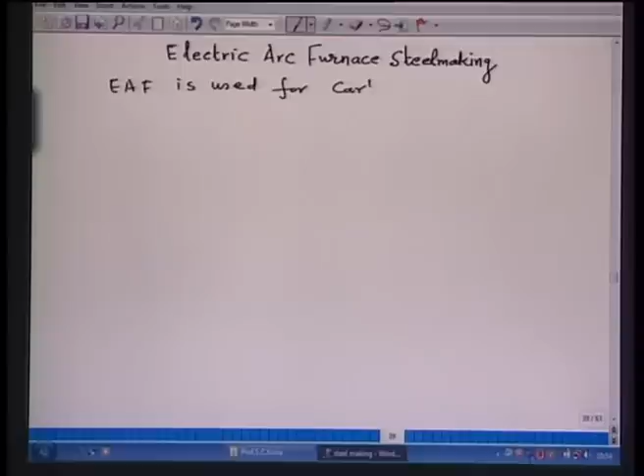Many steel plants have contributed to the growth of electric furnace steel immensely. Presently, electric arc furnace is used for carbon steel making as well as alloy and special steels.

Electric arc furnace is used for production of long products, but nowadays flat products are also being produced. In India, according to one estimate, 26% is the contribution from electric arc furnace in 2006-07 out of total of 50.9 million tons of crude steel.

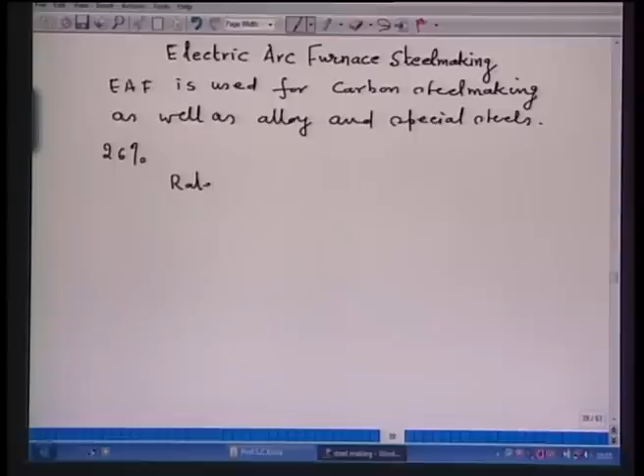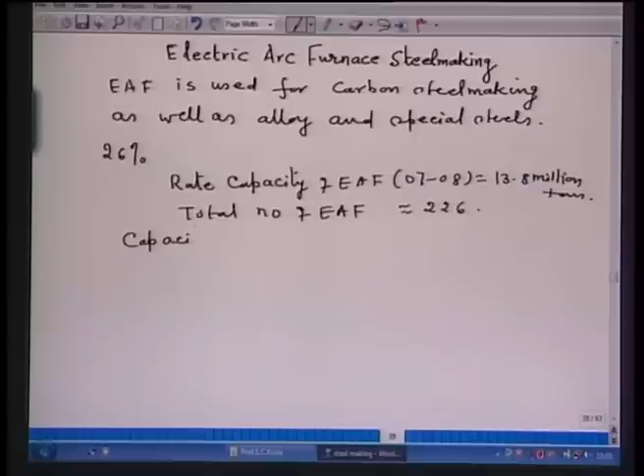Rated capacity of electric arc furnace in 2007-2008 it was 13.8 million tons. Total number of EAF in the same year 2007-2008 was of the order of 226. Capacity utilization is 78% in the year 2007-2008.

Now, this all shows that electric arc furnace has become a major steel producing route in recent years.

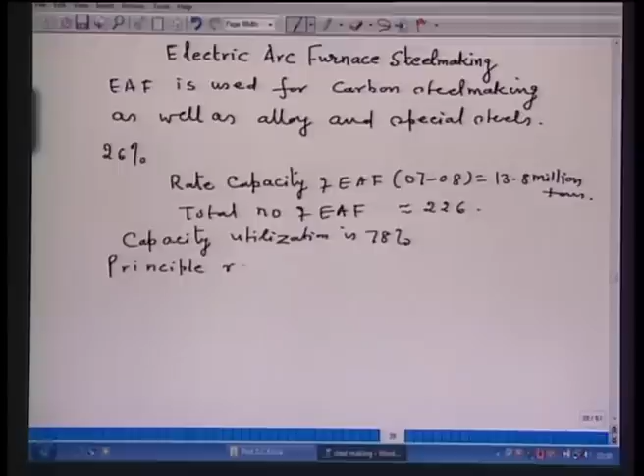Now, principal raw material is scrap, carbon steel scrap or alloy scrap. Source of energy, major source of energy is electricity. Earlier this was the problem that electric consumption was very high, that has hampered the growth of electric furnace steel industry, but now alternative energy sources are also being used. So, with that reason the electric arc furnace has become a preferred route.

Now, how does an electric arc furnace function? Electrical energy is used to produce an electric arc which heats the metal either directly or through arc radiation. To produce an arc, a combination of electrodes are required. Two types of electric arc furnaces are now available presently: one, alternating current electric arc furnace, and another direct current electric arc furnace.

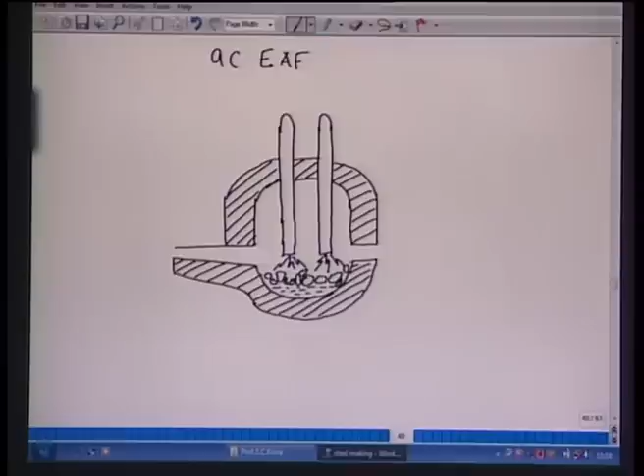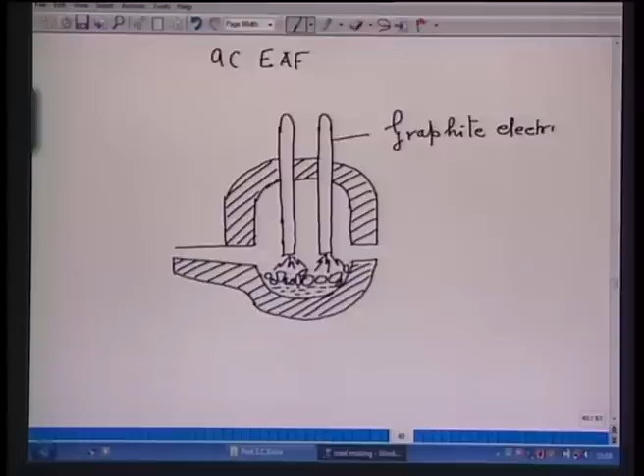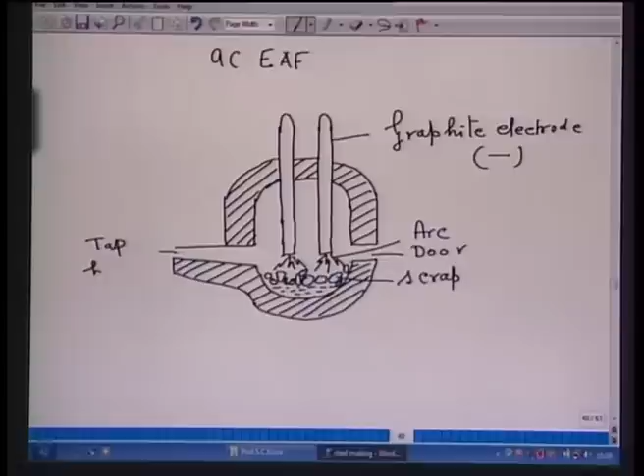In alternating current electric arc furnace, the combination of electrode and cathode looks as shown in the figure. This is a graphite electrode, which is negatively charged, and this is the scrap which also acts as an anode. This is the arc which is produced when graphite electrode hits the scrap. This is the door for charging, this is the tap hole. So, that is how the arrangement of electrode looks in ACEAF.

So, principally what an alternating current electric arc furnace does, a graphite electrode contacts the scrap which acts as an anode, arc is being produced, with the radiation heat of the arc the melting occurs. In alternating current furnace we use 3 electrodes.

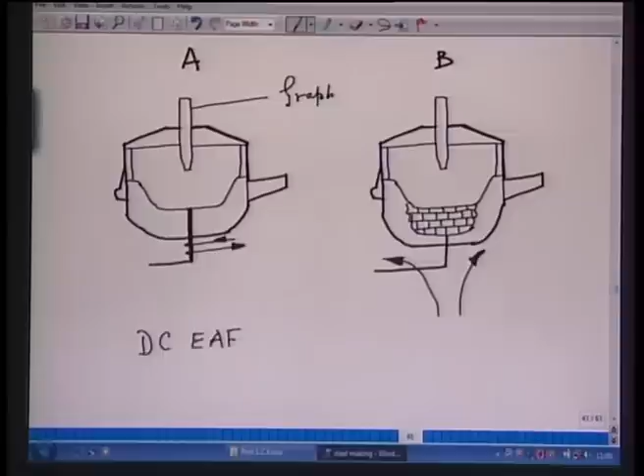Now, another combination of electrode is DC electric arc furnace, which is shown in figure A and B. In figure A and B, this is again the graphite electrode. In DCEAF, one graphite electrode is used instead of 3 which are used in the ACEAF, and another electrode is fixed at the bottom of the electric arc furnace. There are different ways of fixing an anode at the bottom. Here I have shown you 2 ways in figure A and B.

So, in figure A you are seeing that this anode is solid metal. Now, of course, this gets heated up, so it is water cooled. This is one arrangement of cathode and anode in DCEF.

Another arrangement, this is the anode, and in this type of DCEF, anode is a conducting hearth with carbon MgO lining. Electric current is fed with copper plate which is installed at the bottom. This is in fact the copper plate, this is the tap hole, and so on.

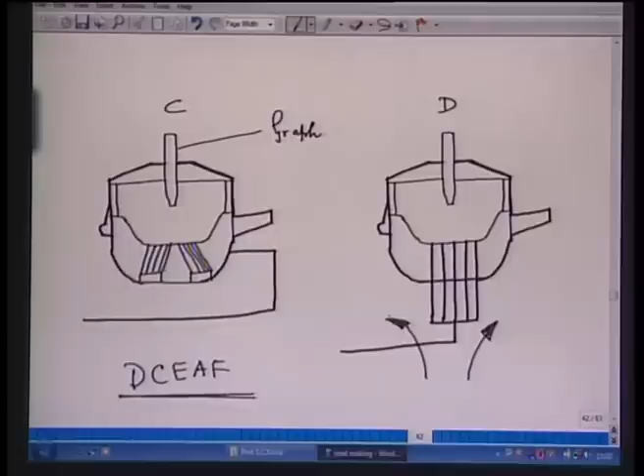There are 2 further arrangements available for fixing up the anode, which is shown in figure C and D. Again in C and D figure, this is the graphite electrode, but the anode is different in both cases. In C, the anode consists of thin sheet, and this is rammed with magnesia MgO ramming mass.

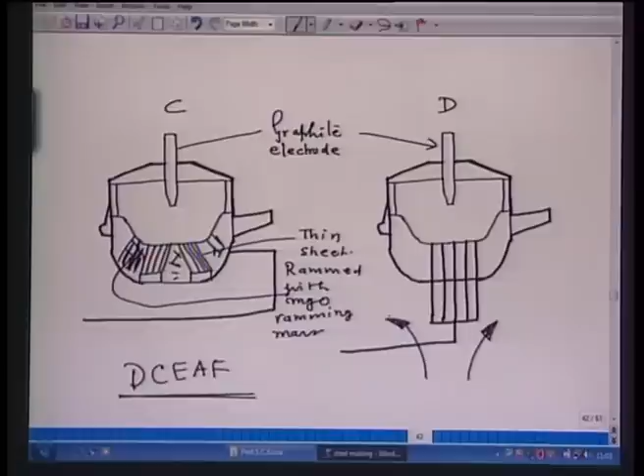That means, this is the bottom, and this is the so called ramming mass, and this is the electrical connection. In the fourth arrangement, shown at D, these are the metal rods. This acts as a positive electrode and they are embedded in

CMGO or MGO ramming mass. So, in electric arc furnace there are essentially two types of furnaces: ACEF, that uses 3 graphite electrodes; DCEF uses a single graphite electrode, and anodes are embedded in the bottom of the electric arc furnace, with different arrangements of embedding the anode. ACEF, alternating current electric arc furnace, has been used for quite a long time, whereas DCEF is a recent phenomenon.

As regards the construction of the main part of the electric arc furnace, it is not very much different between ACEF and DCEF. The only difference between the two is in the arrangement of the electrodes and anodes. In ACEF, 3 graphite electrodes are used; in DCEF, a single graphite electrode is used and the anode is embedded in the bottom. In ACEF, the anode is the metal itself.

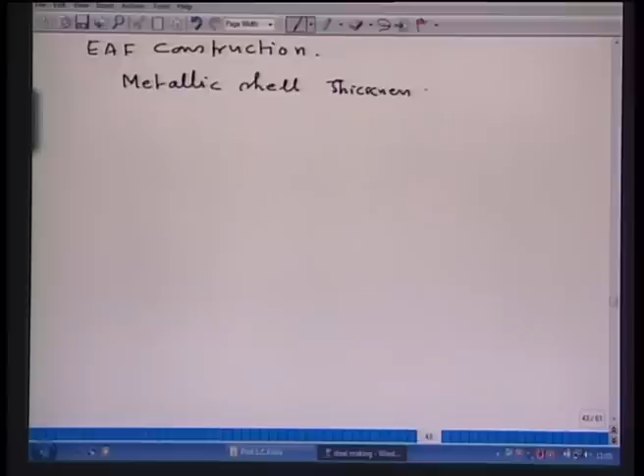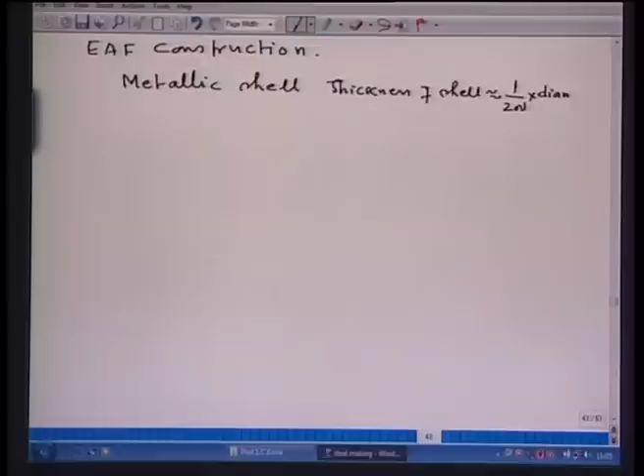Of course, the metallic shell, and the thickness of the shell is approximately 1 by 200 times the diameter of the furnace. So, for example, if we have a 200 ton electric furnace with 8500 millimeter diameter of the shell, then the shell thickness is around 45 millimeter.

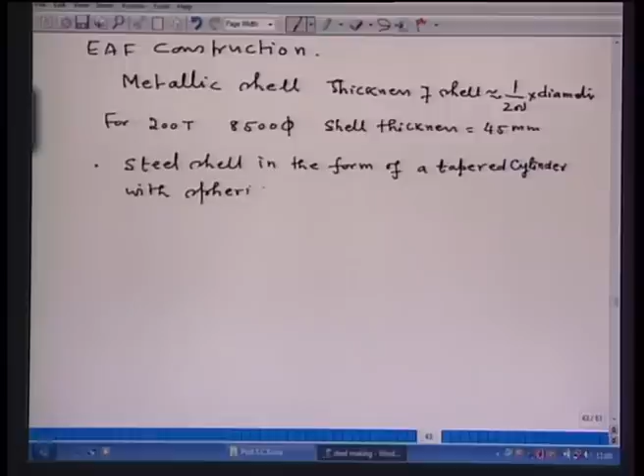Now, some important features of the construction of an electric arc furnace: the steel shell is in the form of a tapered cylinder, which you have already seen in the earlier sketches, with a spherical bottom. The spherical bottom has a slight advantage because the molten metal can be collected very easily over there. Of course, the shell has a refractory lining from inside.

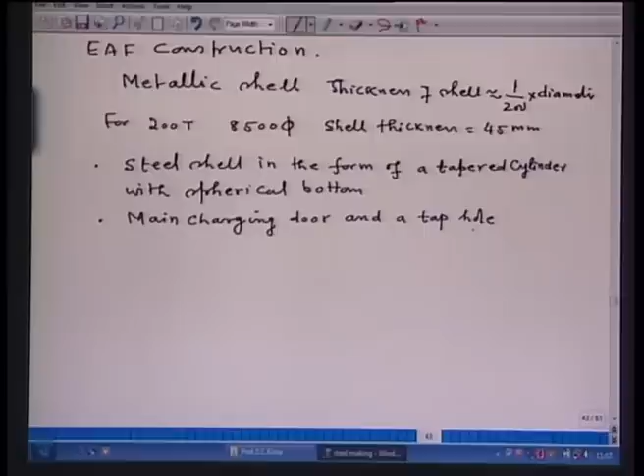Second important thing: main charging door. It has a main charging door and a tap hole, as you have seen in the sketch of AC EAF. AC EAF works with 3 electrodes, whereas DC EAF works with 1 graphite electrode and 1 separate anode which is built at the bottom of the electric arc furnace.

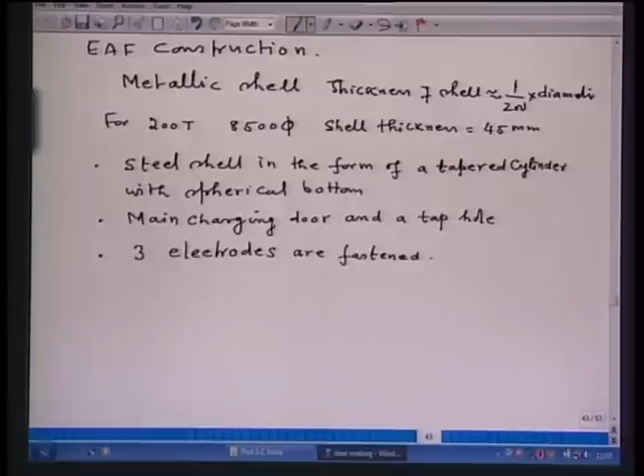AC EAF works with 3 graphite electrodes and they are fastened in electrode clamps. The diameter of the graphite electrode is of the order of 400 to 700 millimeter. It's a quite heavy electrode.

Fourth, current is supplied. The current is supplied by water cooled cable.

Now, typically a 200 ton electric arc furnace: supporting fixtures have a height of approximately 8,600 millimeter. The main furnace has a height of approximately 9,200 millimeter.

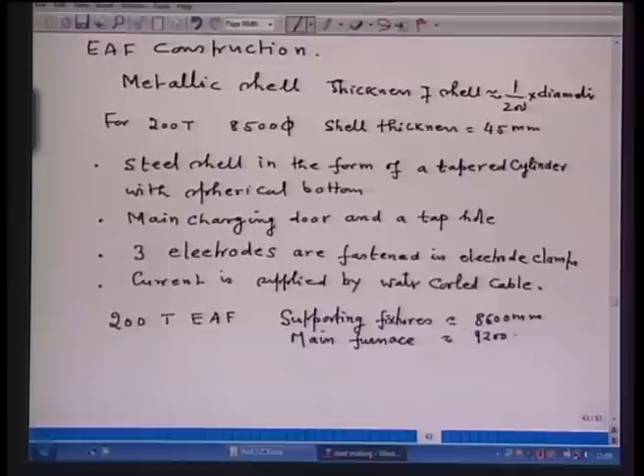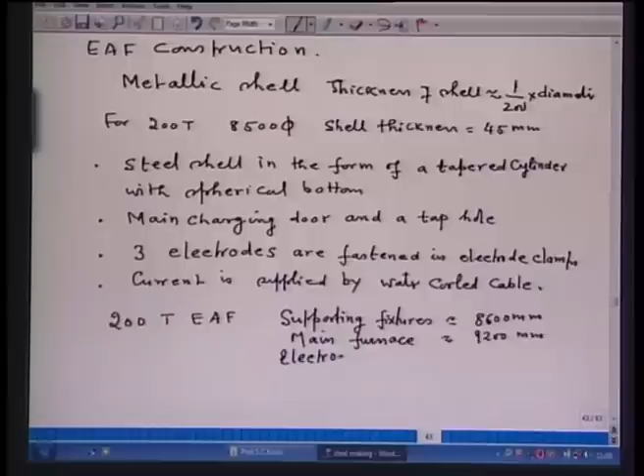Then, because the electrodes are to be lowered and raised, the roof has to be removed. So, for that an arrangement is required on the top of the electric arc furnace, so that a space exists to raise or lower the electrode. So, for electrode insertion and withdrawal mechanism, the approximate height is 7,300 millimeter.

So, an EAF plant for example of 200 ton electric arc furnace capacity will have approximately a height of 25,100 millimeter. So, you can imagine, for the plant layout, that you need 25 meters of height to accommodate the furnace, supporting fixtures, electrodes, and withdrawal mechanism.

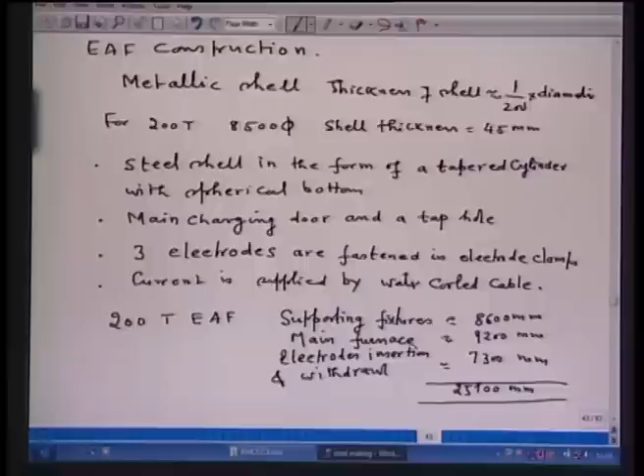Then you require a crane which holds the basket containing scrap. Then you also require a place to tap the slag and molten metal. You require a ladle so that metal can be tapped into it, and all such arrangements are required. So, you can imagine a layout of an electric arc furnace, what it will consist of. All these things are to be placed properly, so that a smooth movement of the inflow and outflow material is guaranteed. That is the important thing over here.

Now, another important thing, refractory lining. Because a metallic shell cannot be used for production of steel - all the heat will be lost, and metal and slag will react - you require a refractory lining. Remember, refractory lining is the heart of steel production, particularly liquid steel production.

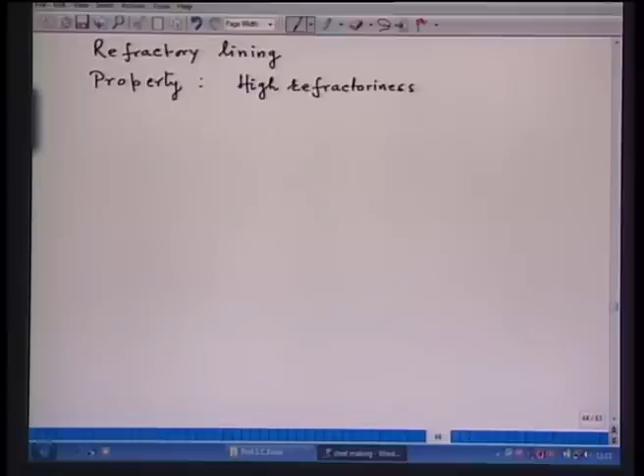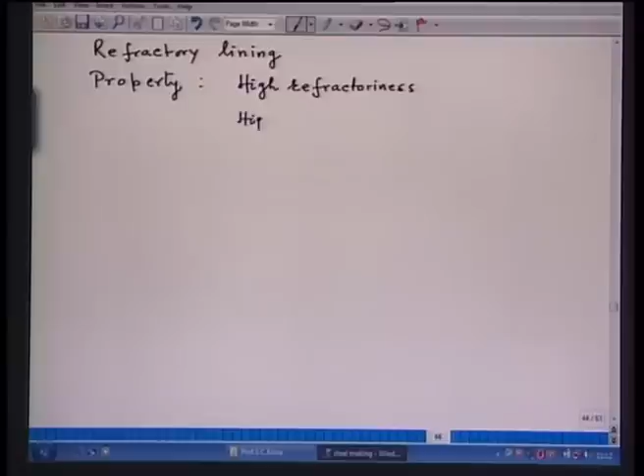So, some of the properties required for refractory: first, you require high refractoriness. Naturally, the refractory should be able to sustain the high temperature created particularly in the arc, because the walls and roof of the furnace will be heated by radiation from the arc, and an arc has a very high temperature. On account of that heat, the refractory lining should be able to sustain that temperature. Also, it should require high mechanical strength, that is, resistance to compression. Then it should also withstand thermal stresses.

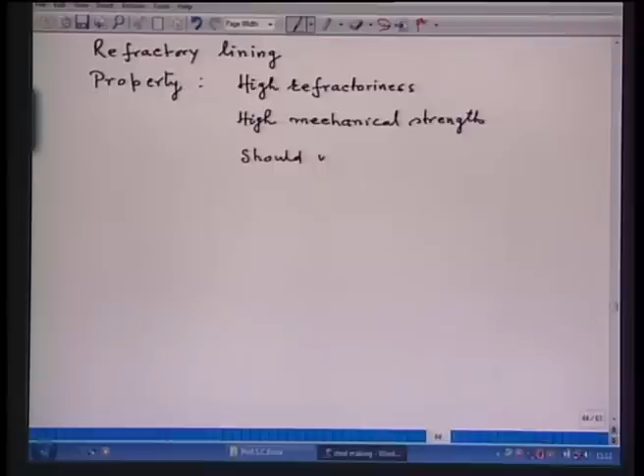Another very important property required for refractory lining material is that it should be chemically stable and non-reactive to slag, metal and gases. Another important property: the lining should have low thermal conductivity.

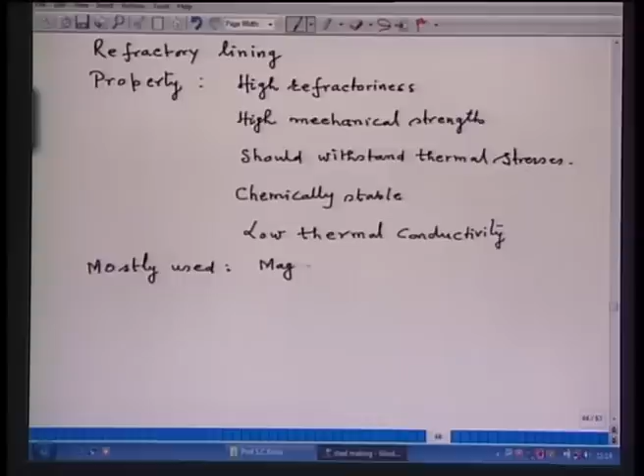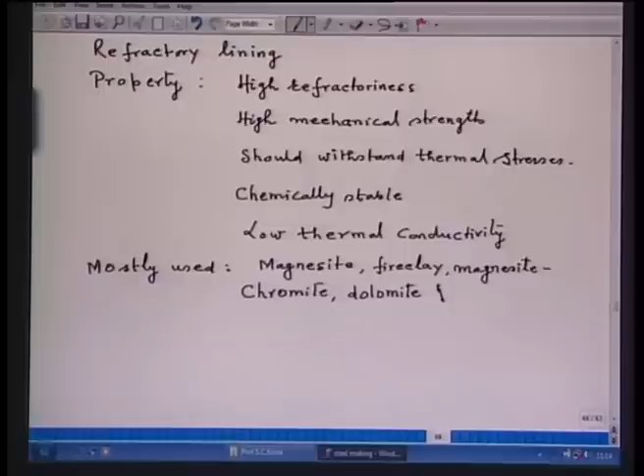Low thermal conductivity ensures that heat losses will be minimum. The mostly used refractories are magnesite, fire clay, magnesite chromite, dolomite, and silica, to line different parts of the electric arc furnace.

The parts consist of bottom, tap hole, side wall, roof of the furnace, and door. They have different requirements, and these different requirements are met by different types of refractory material, because the cost of the refractory material is also an important issue. You cannot put a very expensive refractory where it is not required. So, depending on the requirement, the particular type of refractory is put in the lining of the electric arc furnace.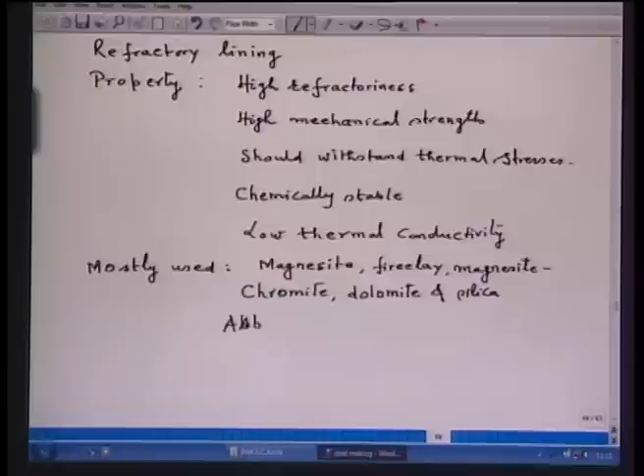Asbestos and lightweight bricks are used for insulating purposes, close to the shell, where the requirements are not that stringent. One can put the lighter refractory material, because the objective there is to block the heat and avoid thermal losses. Whereas the refractory which faces the metal and slag should be a very high quality refractory, able to sustain the chemical attack of slag, metal and gases. So, depending on the requirement, this refractory can be used.

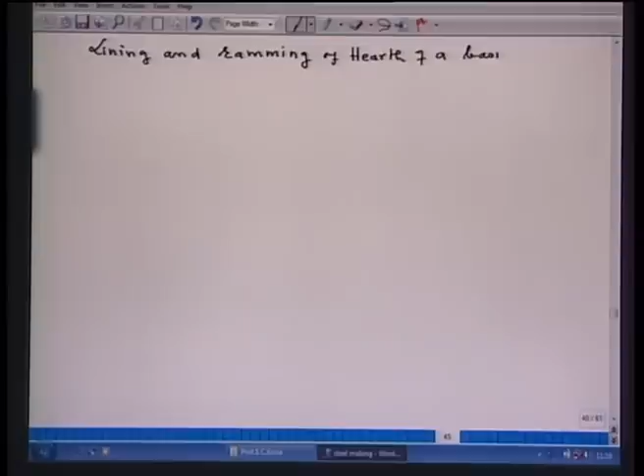Now, lining and ramming of the hearth of a basic furnace. Here again, there are acid furnaces and basic furnaces. Acid electric arc furnace can be used only for melting purposes, but in the basic EAF one can do refining also.

The main difference between the two is in the refractory lining. Nowadays, because the electric arc furnace is used for carbon steel making, where refining is also required, basic electric arc furnaces are widely employed, because their refining can also be done. Refining means particularly removal of sulfur and phosphorus, which is not at all possible in the acid electric arc furnace, because the lining is acid. For removal of sulfur and phosphorus, you require basic lining. So, basic electric arc furnace is widely used because of the production of carbon steel, which requires refining also.

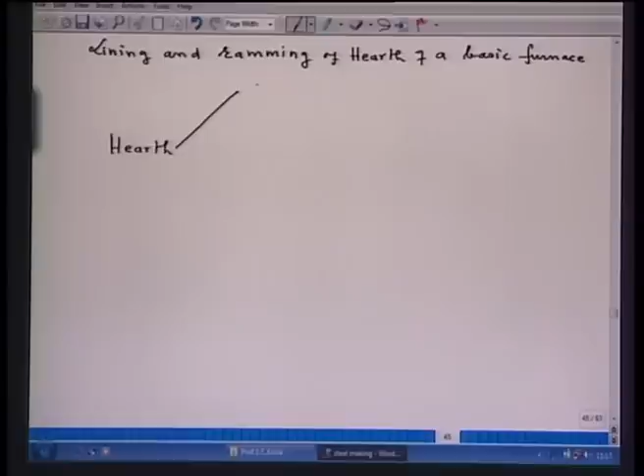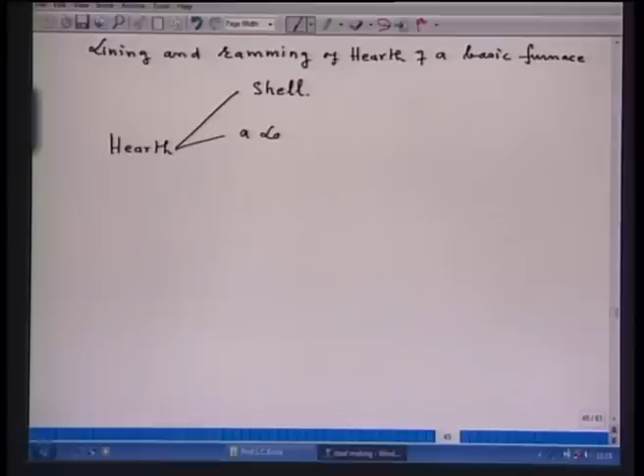A hearth consists of the following layers. First of all you have a shell, then on the top of the shell, a layer of heat insulating material. If I show it here, this is the shell, this is the insulating material.

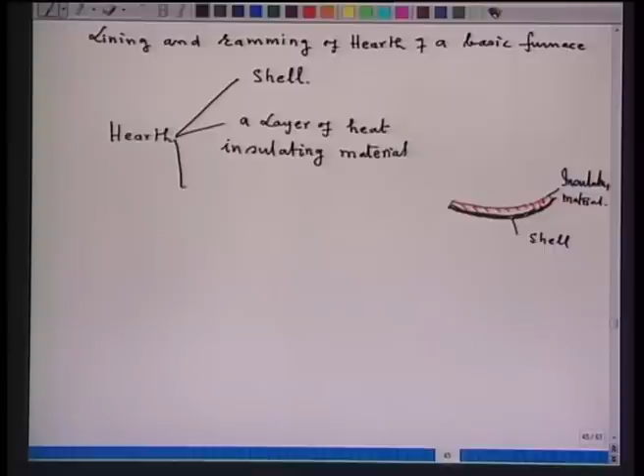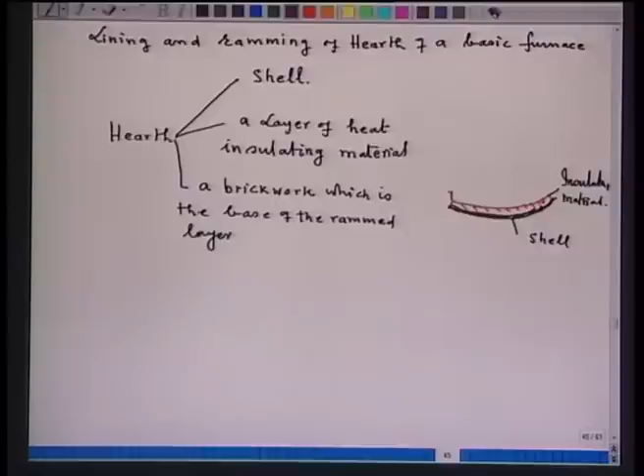On the top of the insulating material, a brickwork construction is done, which forms the base of the ramming layer. So, a brickwork which is the base of the rammed layer. This is a sort of brickwork construction.

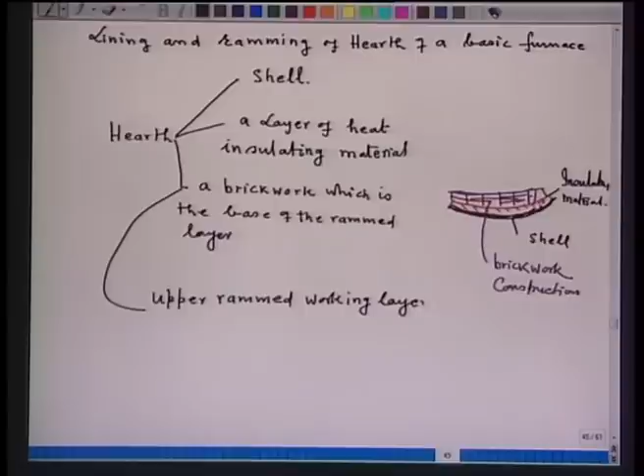Then they provide the upper rammed working layer, and this upper rammed working layer consists of magnesite powder plus resin plus coal, or in some practice dolomite powder is used for ramming. This particular layer, which is on the top of the brickwork lining, is the rammed working layer, and on here you have the walls and so on.

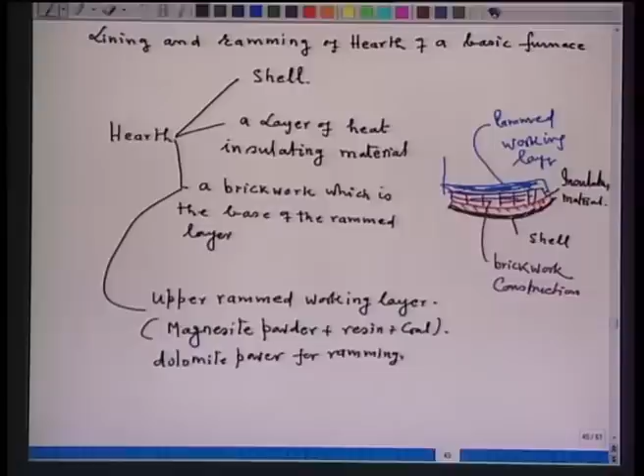Why have I shown this? Because the hearth is a very important part of the electric arc furnace, and the rammed working layer is directly in contact with the metal, and that is why it should have a very high quality. The total thickness of the hearth lining is approximately that of the bath height. So the bath height is say 1 meter or 1.2 meter, and approximately the height of the hearth is of that order of magnitude.

Now let us see the lining of side walls. The shell is first covered with asbestos sheet, then fire clay bricks, and then rammed with the working layer, same as what we have done for the hearth. First the shell has the asbestos sheet for insulation purposes, followed by the fire clay, followed by the ramming mass, because that ramming mass will be in contact with the slag, metal and gases.

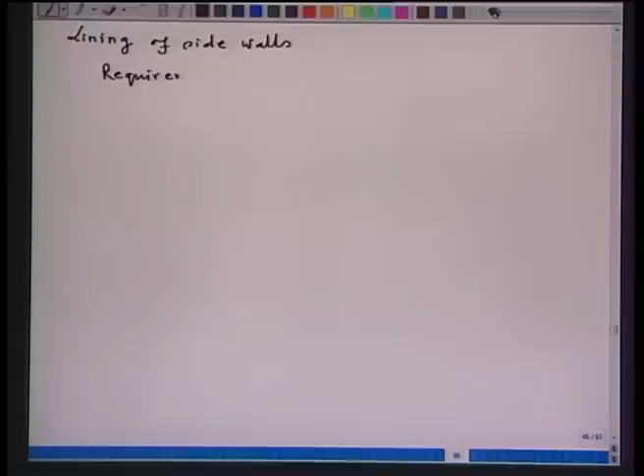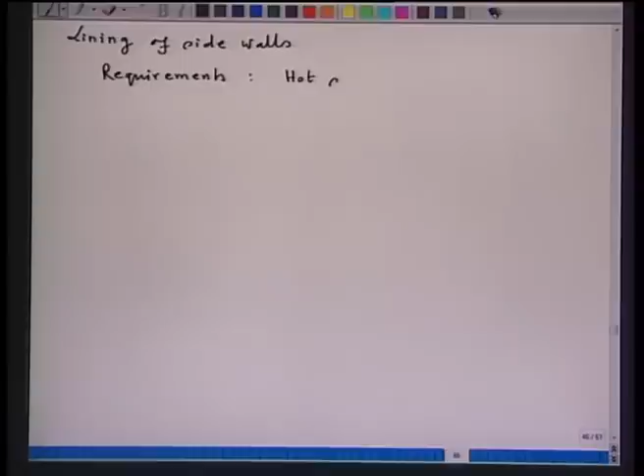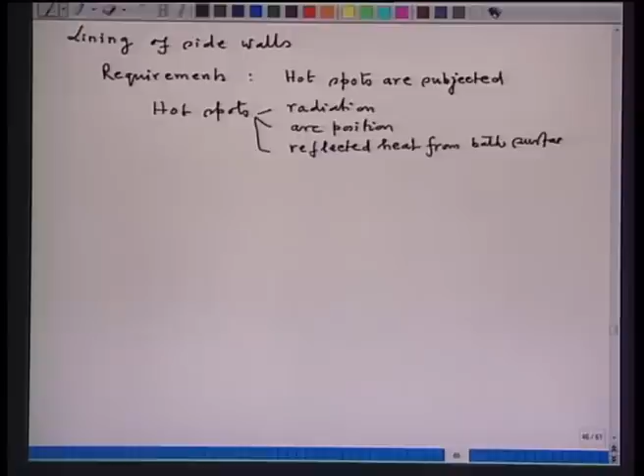Now, some of the lining requirements of the side wall, requirement of refractory for the side wall: because the electrodes produce the arc, and due to radiation of the arc, with 3 electrodes, 3 hot spots could be formed on the walls of the furnace. Hot spots are subjected to severe conditions, meaning a very high temperature. Hot spots are formed due to radiation from the arc, arc position (whether the electrodes are too near the wall or away from it), reflected heat from the bath surface, duration of power input, and absence of slag cover.

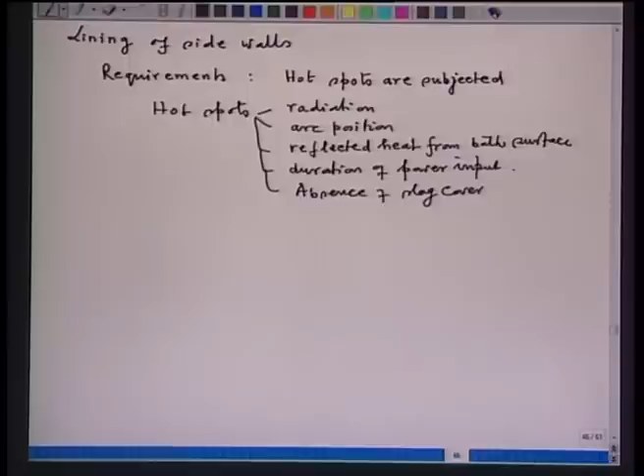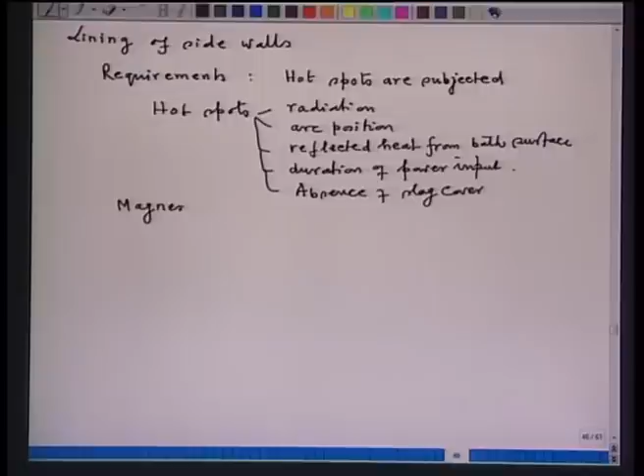So, these are all radiation, arc position, reflected heat from the bath surface, and all these which I have listed, they are all present there. So accordingly, the selection of refractory is very important for the side wall. Normally, magnesite brick lining or magnesite carbon brick lining facing the reaction chamber, chrome magnesite, they are used for the lining material which is facing the slag, metal and gases.

Now, lining of the roof. The roof is movable, charging of scrap is done from the top, so you have to remove the roof. So lining of the roof is also a very important case. It will depend on the heat load. Now, heat load is very high in the melting period, because in the melting period maximum amount of power is supplied to melt the scrap from 25 degrees Celsius to as high as 1500 or 1600 degrees Celsius.

The melt is not covered by slag, so the heat from the arc is reflected to the roof of the furnace, and accordingly the material of the roof is very important. But in the reducing period, once melting is over, the heat load is lower. But once you design the roof, you cannot change it, whether it is low or high. So the refractory material has to be selected considering the highest possible heat load in electric arc furnace operation, and the highest possible load is in the melting period.

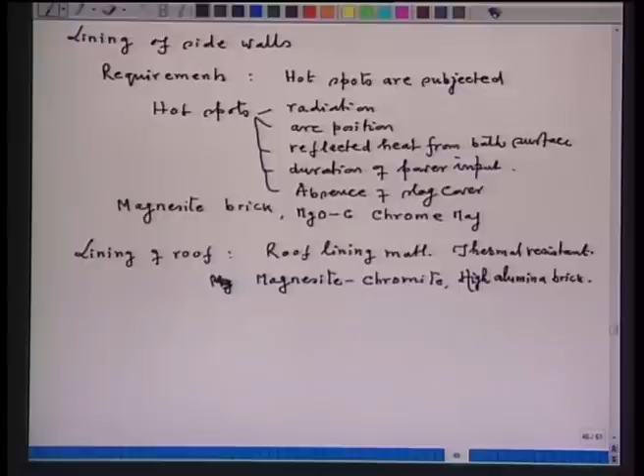Nowadays, use of water cooled elements is also seen because they increase the lining life, since the maximum amount of heat is transferred to the roof. If you have the water cooling arrangement, the life of the roof also increases.

Now let us see the electrodes. Electrodes are used to supply electrical current. 3 graphite electrodes are used in alternating current electric arc furnace. Mind you, 1 graphite electrode is used in direct current electric arc furnace. Please remember.

The material of the electrode could be carbon or graphite, but graphite electrode is the preferred material because it is better, it can be machined easily as compared to carbon, which is brittle as compared to graphite. So graphite electrodes are commonly used. One of the required properties of the graphite electrode is it should not be porous.

The properties required of the electrodes: one property is the electrode should not be porous. Porosity should be very, very low. Why should it be very low? Because...

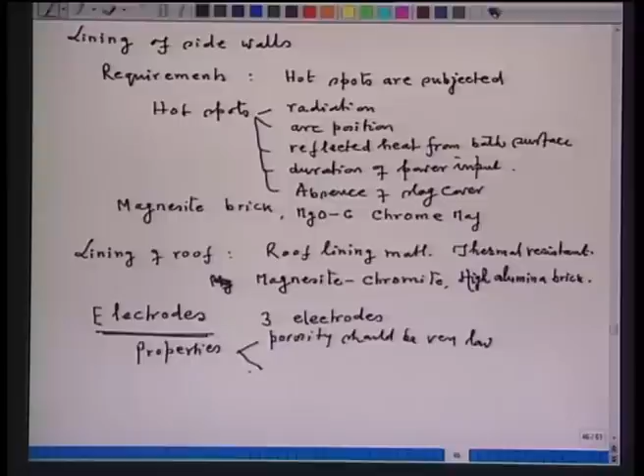oxidation will occur. Then, low resistivity - what does it mean? To minimize electric losses. Then, regular geometric shape - you should be able to possess a regular geometric shape so that the contact is ensured.

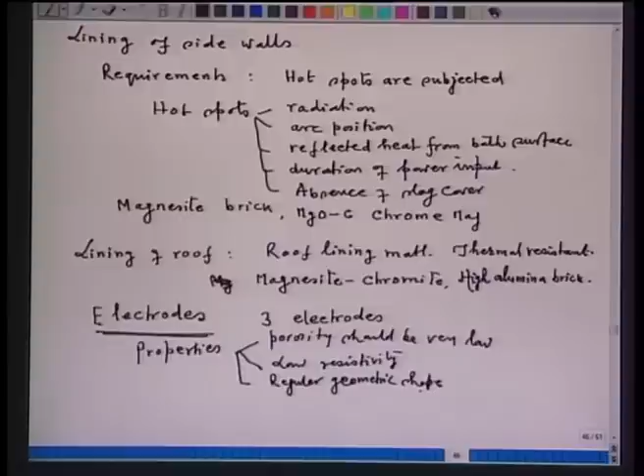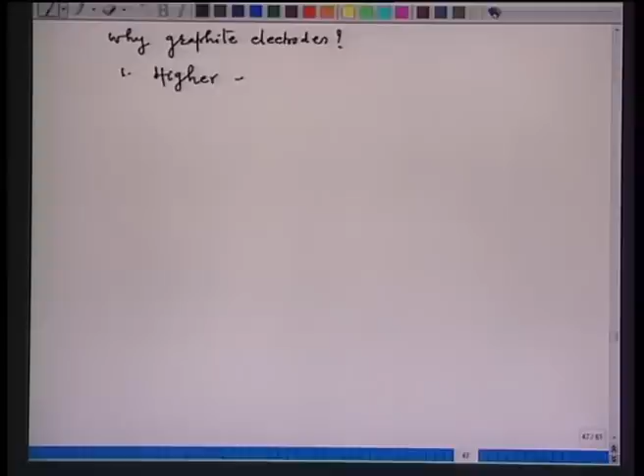Now, why are graphite electrodes preferred over carbon electrodes? Because graphite electrodes have higher electrical conductivity. Higher electrical conductivity means higher current density is possible and lower electric losses will be there, because ultimately you will be supplying electricity. If the losses are more, you have to supply more amount of electricity.

Second, oxidation begins at higher temperature. Third important property, easy to machine, because you have to prepare an electrode which can be machinable, since whatever shape of material you are getting, you have to prepare a round shape. Shape is important because they are to be clamped in a graphite holder. If the clamp is loose, then losses of electricity will be there. So a material which can be machined is very good, and in that aspect, graphite is easy to machine.

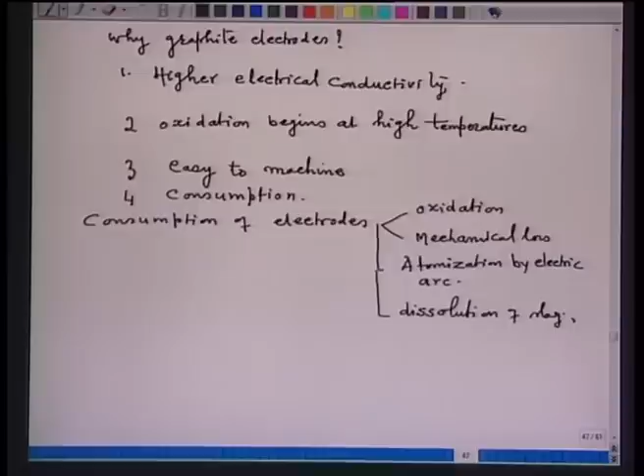Electrodes in a 3-phase arc furnace are positioned at the apexes of an equilateral triangle. Electrode spacing diameter is very important. If the electrode is spaced near the wall, the lining will be affected, but you occupy a larger area of the bath, so melting will be faster, though that is not good because the lining will be affected. If the electrodes are too far from the wall, they confine a very small area for heating and the melting rate will be low.

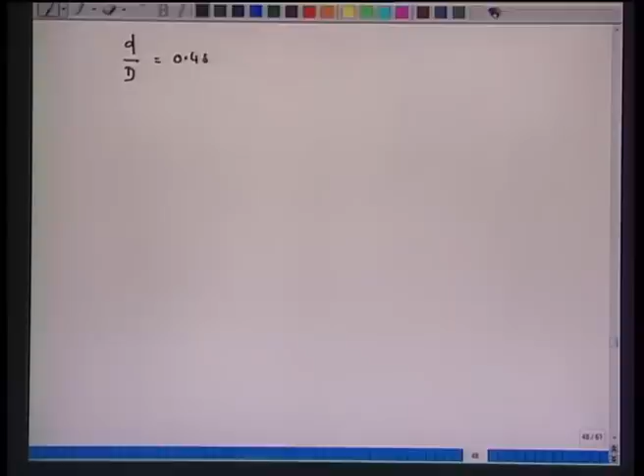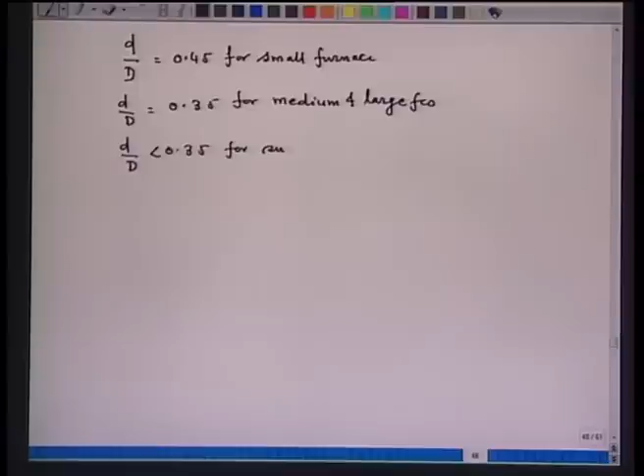So a ratio between the pitch circle diameter of the electrodes and the diameter of the bath is of the order of magnitude I am giving you here. If d is the pitch circle diameter of the electrodes, where all three electrodes are arranged at the apex of an equilateral triangle, and D is the bath diameter, then d/D is approximately 0.45 for small furnaces, 0.35 for medium and large furnaces, and less than 0.35 is preferred for superpower furnaces.

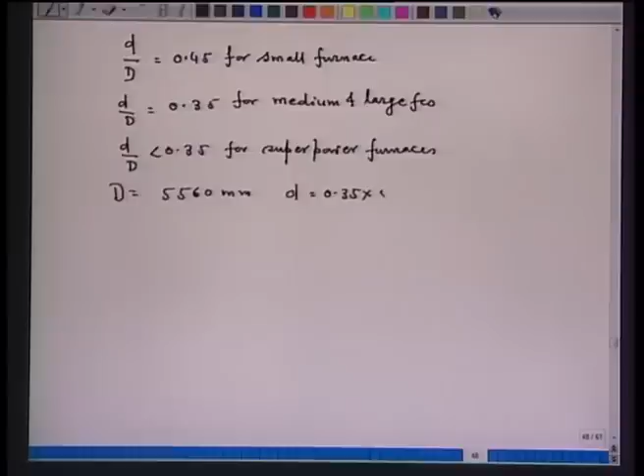For example, if the diameter of the bath is 5560 millimeters, then the pitch circle diameter of the electrodes would be 0.35 into 5560, which is equal to 1960 millimeters.

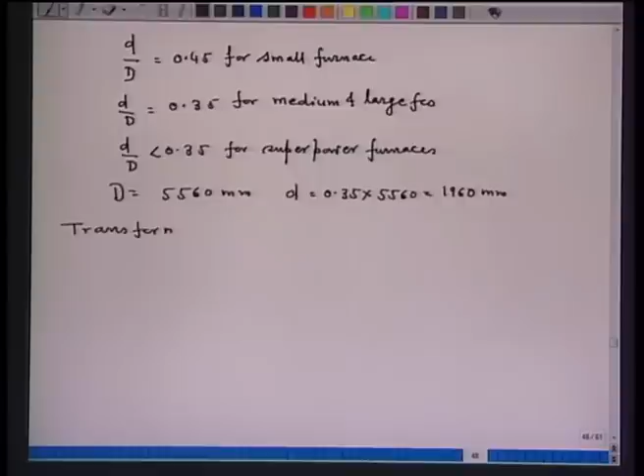Another important issue is transformer power. Among other factors, transformer power depends upon whether the oxidizing period or the reducing period is longer. Power required during the oxidizing period is much larger compared to the reducing period. High alloy steels mostly require a reducing period, so the power requirement is low. For carbon steel, oxidizing is required for refining and melting, so the power requirement is higher. This means power requirement for plain carbon steel is relatively higher than for alloy and special steel.

So power consumption in melting is of the order of 470 to 650 kilovolt-ampere per ton for small furnaces. These are just roundabout figures; you may have different figures, but they may lie in this range. For bigger furnaces, the power requirement is about 450 kilovolt-ampere per ton.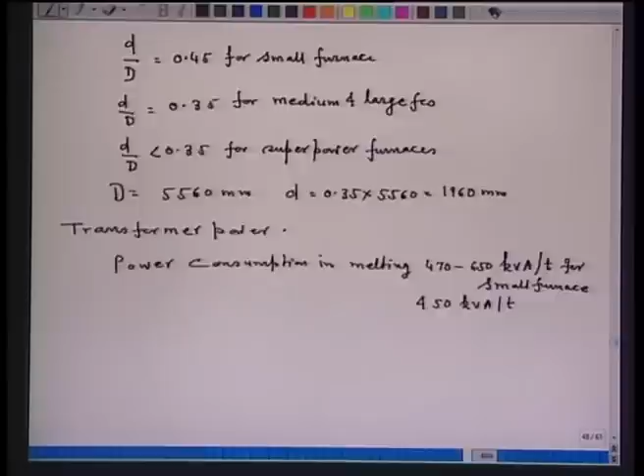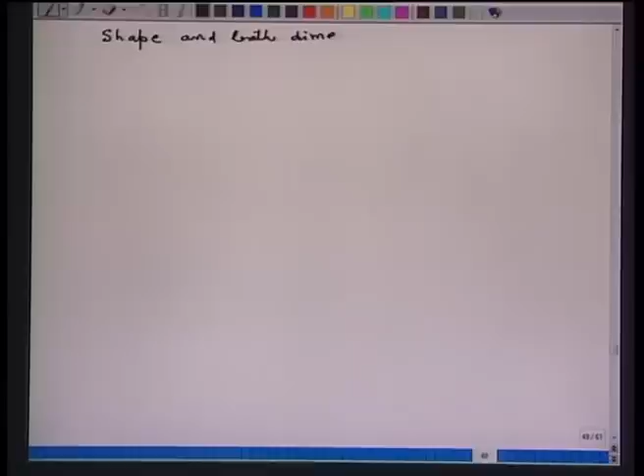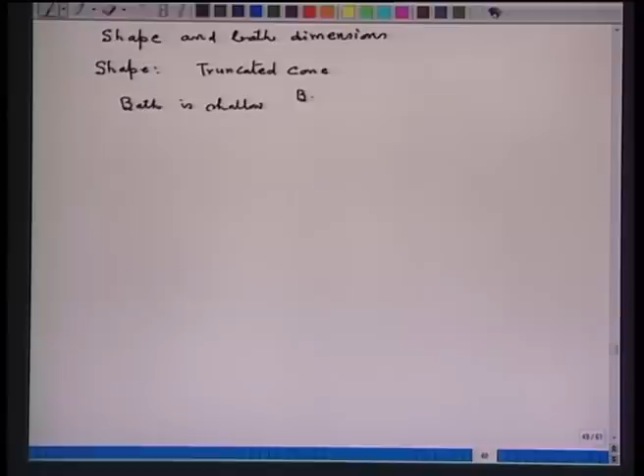Now, shape and dimensions of the bath. The shape of the bath is a truncated cone, with the smaller base at the bottom, combined with a spherical segment. As said earlier, it is easier and faster to collect a liquid metal pool in the spherical bottom. The bath is shallow, meaning bath height upon bath diameter is in the range of 0.2 to 0.25. So electric arc furnace steel baths are shallow in nature.

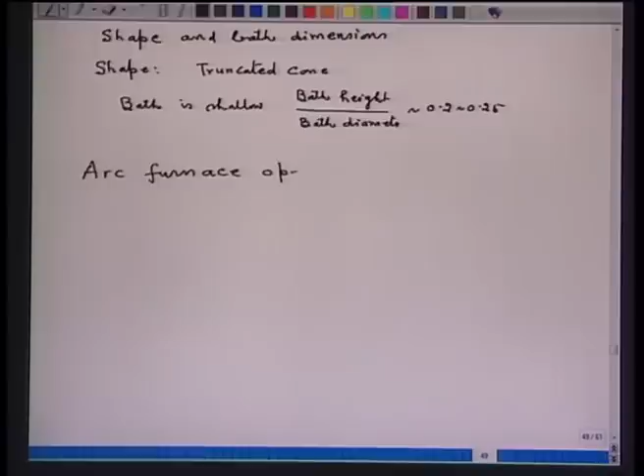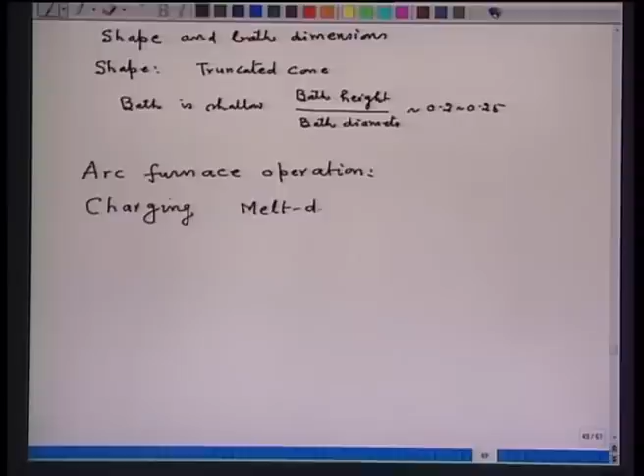Having studied the various features of the electric arc furnace, let us now quickly go through arc furnace operation. Arc furnace operation consists of charging, then meltdown stage, refining and finishing, and last, once everything has been done, you have to tap it for further processing.

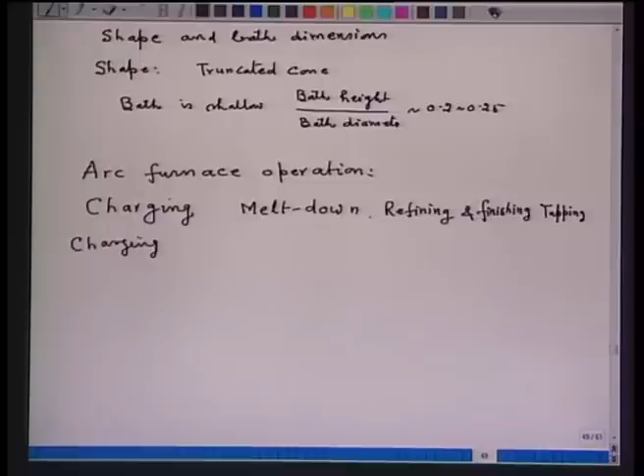So in the charging stage, what is done? Electrodes are raised, the roof is swung away, and a basket containing scrap is filled and lowered into the furnace. So the charge consists of scrap plus coke plus limestone. In some small furnaces, door charging is also done, but in bigger furnaces door charging is not possible. So heavy baskets of high capacity are filled with scrap, raised through a crane, and dropped from the top of the furnace into the hearth.

The arrangement of scrap in the basket is important. First, light scrap is put in, and on top of the light scrap, heavy scrap is put. This is obvious, because heavy scrap takes a long time to melt. So if heavy scrap comes in contact with the arc, it melts first, while light scrap melts more easily. That is an important small detail.

In the charging mode, besides scrap, coke, and limestone, iron ore can also be charged. And sometimes, if you want to charge refractory alloying elements, for example to prepare alloy steels, they are directly charged into the arc crater region because the temperature is very high there. Refractory materials have very high melting points, so if they are not charged in the arc crater region, they will not melt. Certain alloying elements can also be charged along with the scrap.

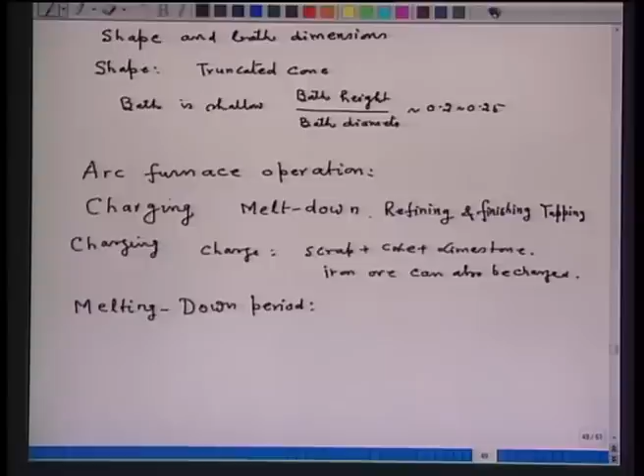Thereby begins the melting down period. In the melting down period, first an arc is struck, and the metal melts or the scrap begins to melt and collects on the hearth of the furnace.

As the melting progresses, the electrodes are gradually lowered so that a stable arc is present during the entire meltdown operation. Remember, in the entire electric arc furnace steel making, it is the meltdown period that consumes a very large amount of power. Shorter the meltdown period, less power will be required; longer the meltdown period, more power will be required. So meltdown period is the period where power consumption is maximum.

Now, during the meltdown period, silicon oxidizes to SiO2, manganese oxidizes to MnO, iron also oxidizes to FeO, and phosphorus also oxidizes to P2O5.

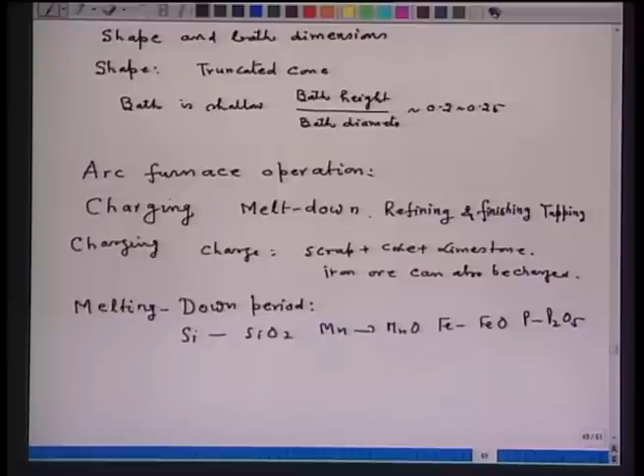Remember that iron ore has also been added, which creates oxidizing condition, along with lime and limestone, so lime will also be available. So in the melting period itself, the slag will form and phosphorus will also be removed, because removal of phosphorus, as learned earlier, requires oxidizing and basic, limey slag. So during the meltdown stage, dephosphorization is also achieved.

Now, the time of melting depends on the following factors. First of all, it depends on the power of the transformer.

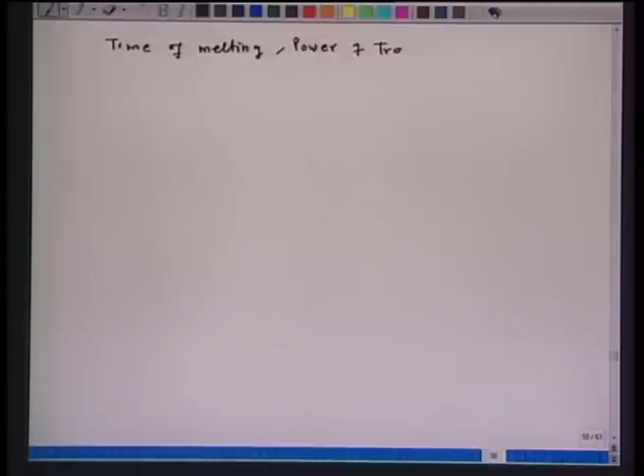It also depends upon whether the arc is long or short. A longer arc needs lower current, lower heat losses, and higher electrical efficiency, meaning melting will be faster. Also, long arcs are covered by the solid charge, because a smaller arc may not be covered by the solid charge. If the arc is long, it will be covered by the solid charge, resulting in less heat losses.

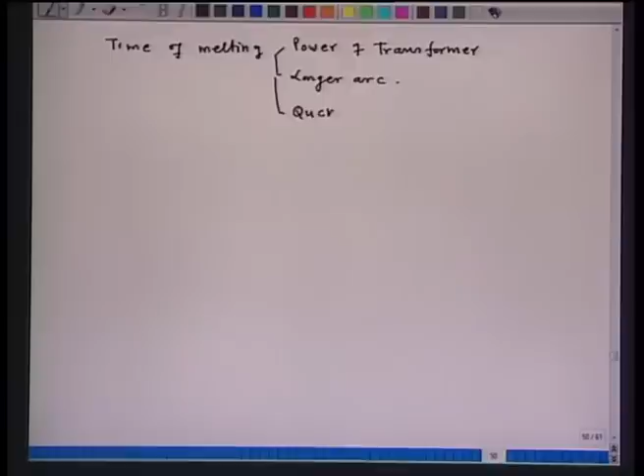Also, quick charging shortens the meltdown time, because every time you charge a big furnace, say 2 or 3 times, you have to stop the process and open the roof, causing heat loss. So quick charging helps to reduce the meltdown time.

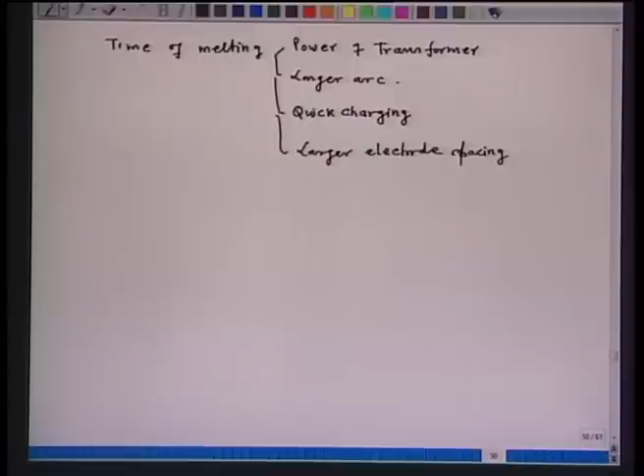Larger electrode spacing decreases the meltdown period, because the arc encompasses a larger scrap area. But too large a spacing brings the arc too near the walls, affecting the furnace walls accordingly. So an optimum has to be struck.

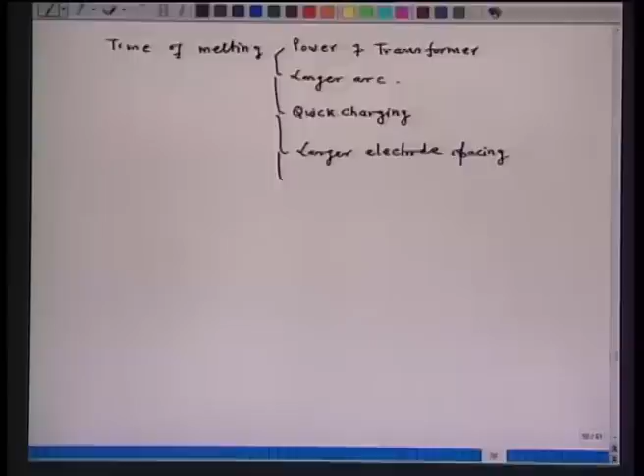A deep bath and relatively narrow shell also shortens the meltdown time. So in the meltdown time, we can also achieve some refining, as already mentioned — dephosphorization can be done. When all the metal has been molten, then the reducing period, or refining and finishing period, begins.

So the end of the meltdown stage is when all the scrap has been molten, and that end of the meltdown period is called attaining the flat bath condition.

Now, in the refining and finishing period, at the end of meltdown we have a slag which contains FeO, CaO, SiO2, MnO and Al2O3, which comes from the iron ore. Some calcium fluoride is also added for slag fluidity.

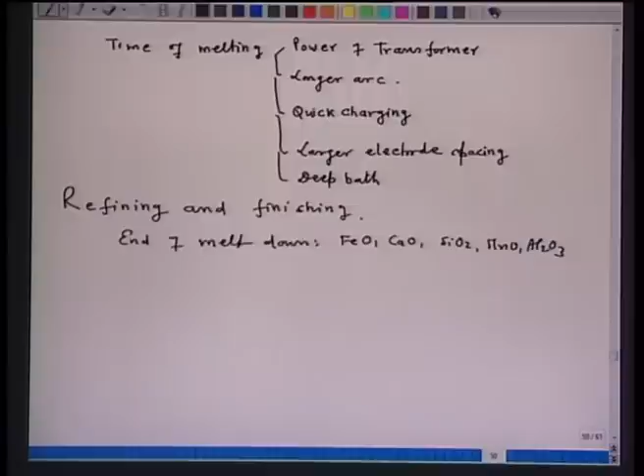Now, the important point in the refining and finishing operation is that the opening carbon content should be around 0.25 to 0.3% higher than required for the chemistry of the steel being produced. If the carbon is less than this, certain recarburizers are also added along with the scrap. This is required to facilitate the carbon boil, because the carbon boil helps to remove gases, as well as helps inclusion flotation.

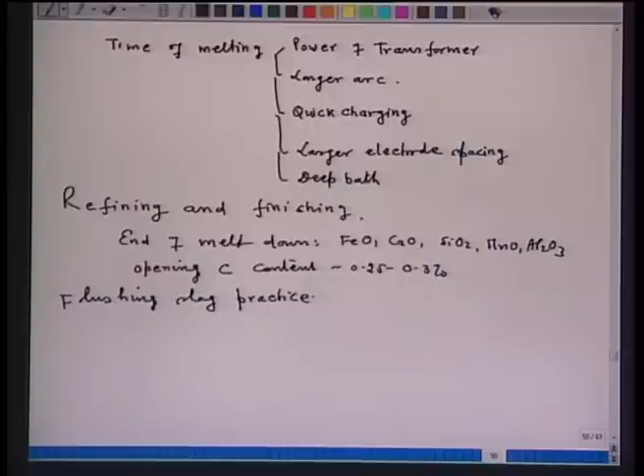This is called the flushing slag practice. Whether flushing slag practice is used depends on whether desulfurization is required, because the slag produced is highly oxidizing in nature, needed for phosphorus removal. If we want to produce a low sulfur steel, or carry out desulfurization, we have to remove the oxidizing slag and make a reducing slag. For making the reducing slag, calcium oxide, burnt lime, and pulverized coke are added.